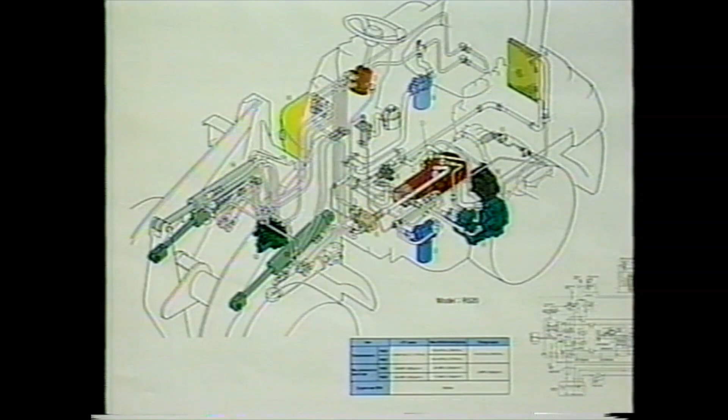The use of hydraulic systems has increased the productivity of all modern equipment. Hydraulic systems allow operators to control enormous amounts of mechanical energy and to perform large work tasks both quickly and economically. With proper maintenance, power equipment will provide many hours of service with little or no costly downtime.

When service is required, problems that occur are easily handled when the technician uses the right diagnostic methods and tools.

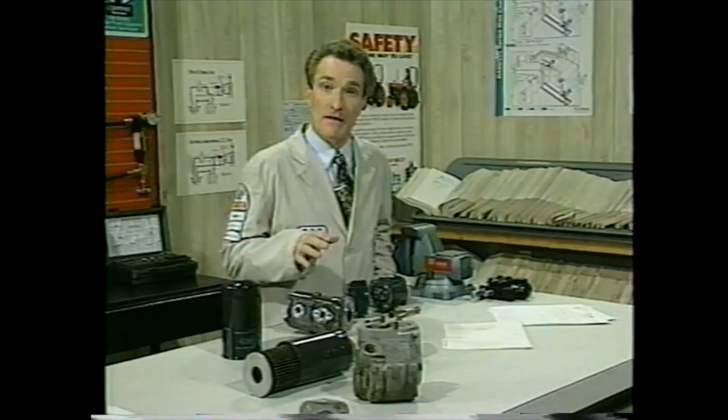Hydraulic systems provide a challenge to the professional technician. Modern hydraulic circuits incorporate logic to protect the operator and machine. When these systems need repair, proper diagnosis is the key to reducing downtime for equipment operators. Misdiagnosis is a major problem that causes significant financial loss and extra downtime each year.

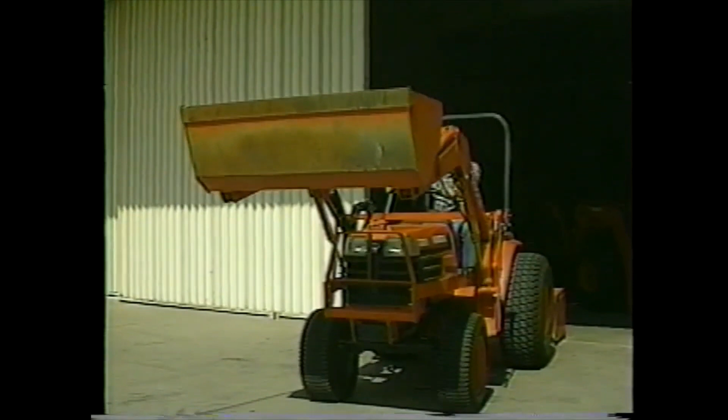In one warranty case, the technician's initial diagnosis on a loader with a slow cycle time was a bad pump. After he changed the pump, the machine's performance or cycle time improved only slightly. The technician then replaced the loader control valve, which fixed the problem. The total cost of the repair exceeded $800.

After testing the components and inspecting the service records, Kubota's warranty department found no problems with either the pump or control valve. The system cartridge relief valve was finally found to be faulty. With the proper test equipment and diagnostic techniques, the technician could have quickly discovered the problem and repaired it. The cost of this bill was excessive. It was unfair to the customer and the dealer, who had to absorb the difference in the warranty cost.

Our customers expect us to find the correct problems in the shortest possible time and at minimum cost. We owe our customers the best possible service.

The purpose of this program is to give you, the technician, an overview of the process of hydraulic system troubleshooting and repair. We'll demonstrate the most common types of problems encountered by Kubota technicians. The procedures demonstrated in this video will help you locate just about any hydraulic problem you may encounter.

After completing this program, you'll be better prepared to prevent a misdiagnosis. You'll also save your customer expensive downtime and your dealership time and money.

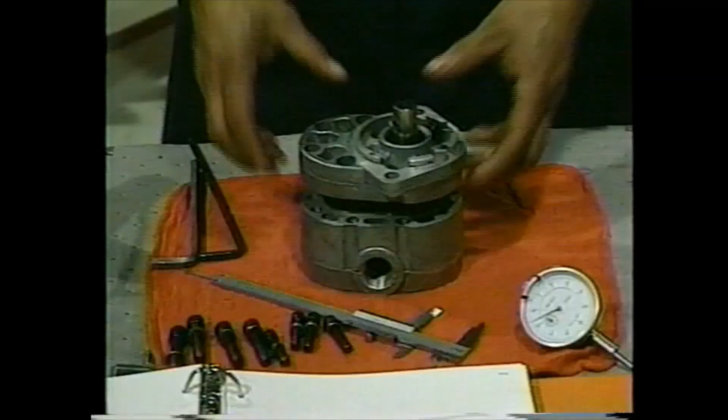Professional troubleshooters have a basic understanding of hydraulic components, a basic understanding of hydraulic systems, a full understanding of hydraulic symbols, a full understanding of hydraulic circuit diagrams, and a full understanding of hydraulic circuit testing and diagnostic tools.

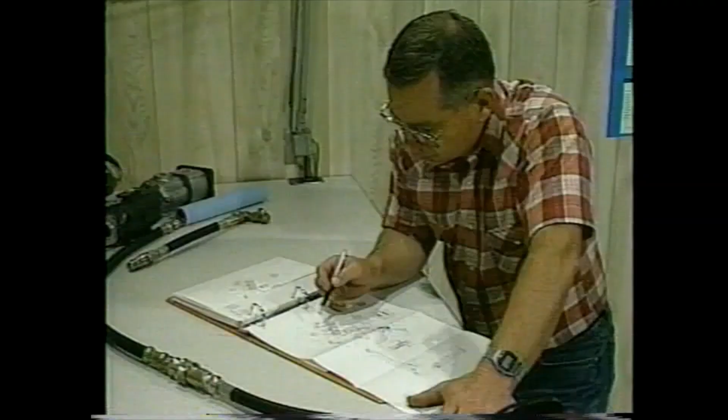Let's take a minute and review our systematic approach to troubleshooting. First, know the system and the components that make up that system. You should also know the path of flow or sequence of events. Study the technical manuals and schematic diagrams of the equipment you're going to evaluate. Never make assumptions or second-guess a system.

Second, talk to the operator and field technicians, when possible, to get first-hand information on the machine's history. Third, inspect the machine thoroughly for mechanical and safety problems. Don't forget to remove the keys and tag the steering wheel before starting your work. This is done to prevent someone from starting a machine while it's being worked on and is out of service.

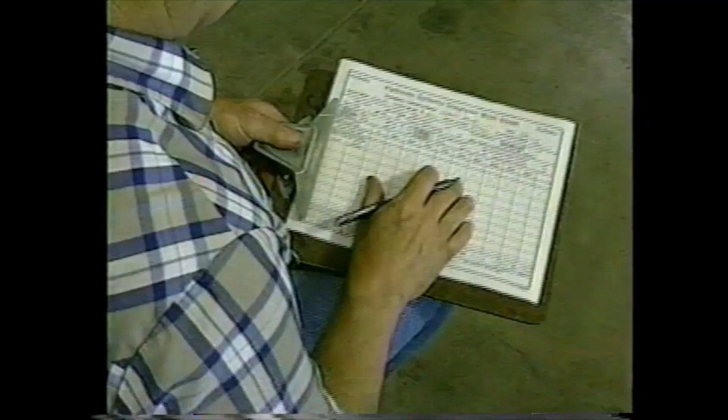Fourth, list possible causes for the problems found in the service manual's troubleshooting charts. Start with the quickest and most obvious things. Fifth, refer to the hydraulic system schematic. Pencil in pump flow and valve opening pressures for later reference.

Lastly, you should be very familiar with the test circuits in order to use the diagnostic tools properly. In this VIP service training program, we'll use information from 4 actual cases where technicians failed to follow the accepted standard practices, resulting in unnecessary service time and part replacement. These 4 case studies will provide you valuable experience to strengthen your skills in diagnosing hydraulic system problems.

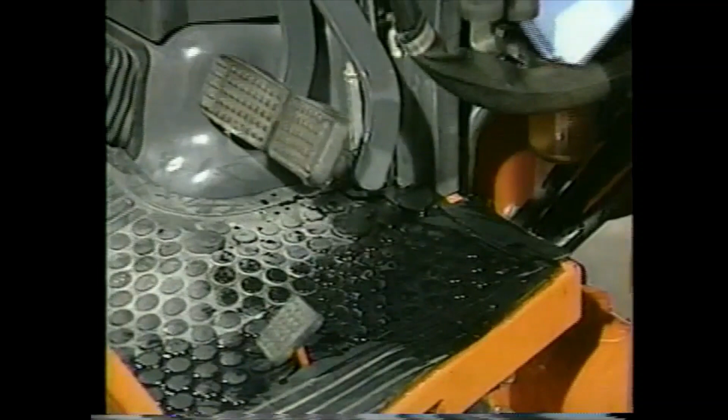But first, let's review a few safety points. Remove all hydraulic pressure by stroking the control valves. Use only the proper tools. Use a paper towel to find leaks, never your hands. Remember to remove the key and tag the steering wheel to prevent any injuries and damage to equipment.

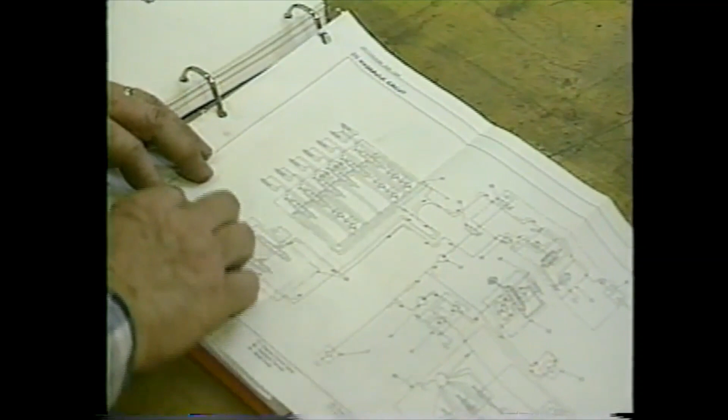Before a technician can make an accurate diagnosis of a hydraulic problem, he must be familiar with the particular system he'll be working on. Hydraulic schematics provide a graphical representation of all the components in the sequence in which they operate. Unfortunately, the technician didn't find the hydraulic schematic for this model loader, so he looked at one for a similar model.

Before you start to work on any hydraulic problem, review the manuals and reference materials so you understand that particular system. Studying ahead of time allows a technician to familiarize himself with the machine even before he sees it.

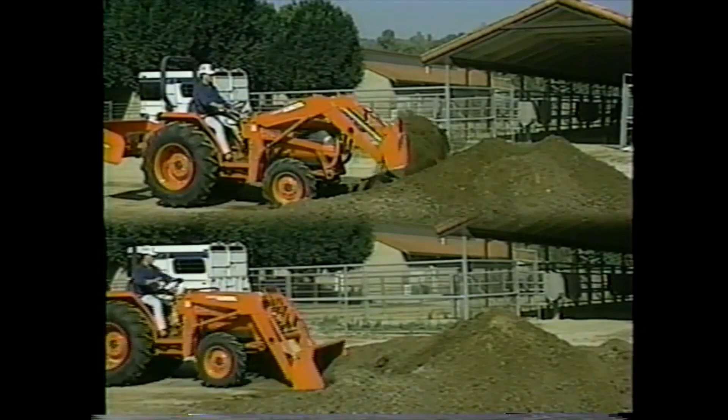In this case, the operator explained to the technician that the 3-point hitch, power steering, and loader functions were erratic at times, and loader operations had been getting slower over the last several weeks. He also told the technician he compared this tractor with others he operates.

The technician asked the operator when the problem first started. The operator pointed out that this was the second time it had happened. The first time, at 680 hours, the system gradually slowed down, then it seemed to correct itself. It also made an unusual noise somewhere around the engine compartment, but the noise went away.

The technician asked to see the maintenance records, then checked the number of hours on the tractor, about 930 hours. The operator said he knew he was a little overdue for maintenance, but he'd been working 12 hours a day for the last 4 months.

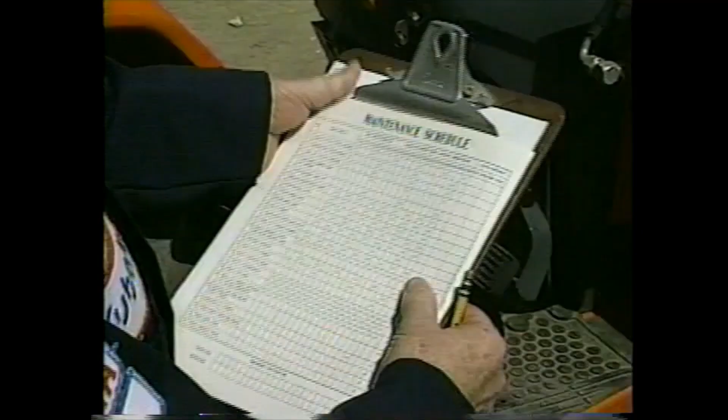The records also indicated that the hydraulic oil filter was changed at 65 hours, and the next 4 filter changes were skipped until a week ago when all the oils and filters were changed.

The technician operated the loader and evaluated its cycle time. He had no trouble establishing the machine's slow cycle time by comparing it to a second tractor in the yard. The technician decided to do a full pump test at the shop to verify the pump's flow rate.

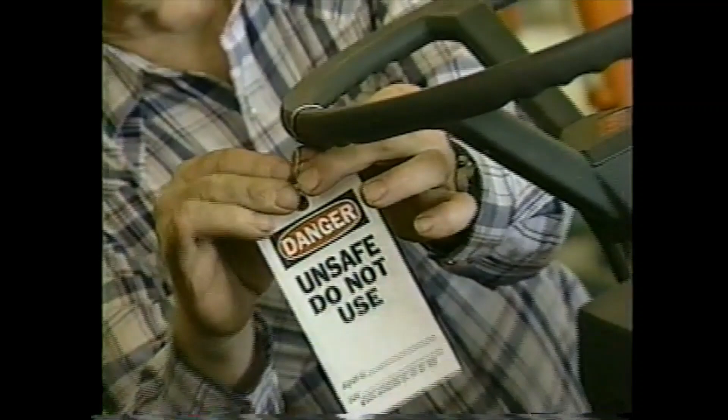Before working on the tractor loader, he tagged the steering wheel and removed the key.

To accurately diagnose the pump, you must isolate it from the hydraulic system, so no other component can cause the pump to look defective. This is called a direct pump test.

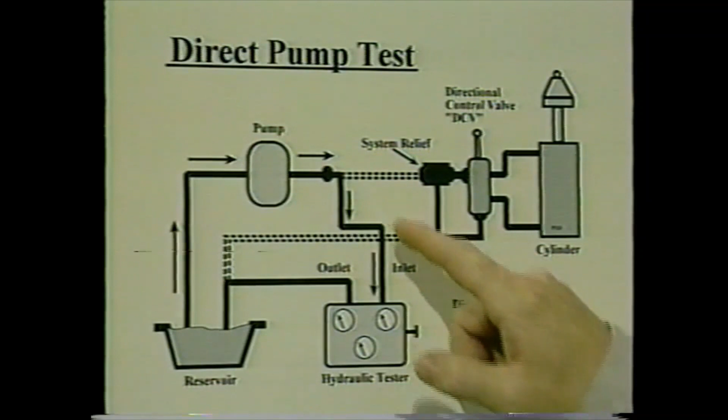The rest of the system can't work properly if the pump is not generating its rated gallons per minute at its rated pressure. From our direct pump test diagram, we can see that you must first disconnect the pump's high pressure outlet pipe and connect the hydraulic system analyzer.

Special adapters are available from OTC to accomplish this procedure. The analyzer measures the hydraulic oil temperature, the pump's flow in gallons per minute, and the pressure developed from restricting the oil flow through the analyzer using the flow control valve.

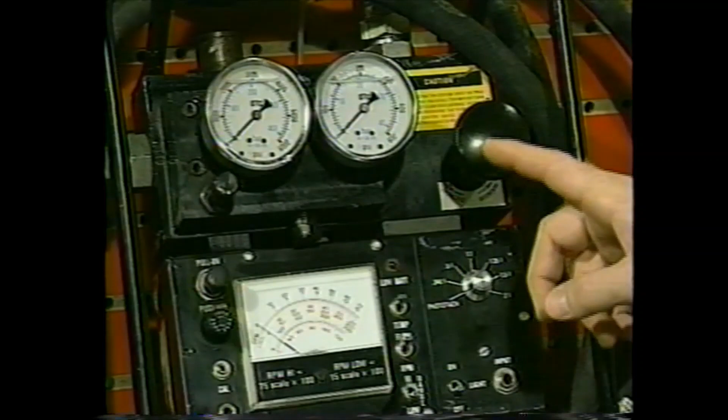Hydraulic couplers are frequently damaged during service. To prevent damaging any couplers, always use the 2-wrench method to loosen and tighten hydraulic hoses and fittings. For more information on the 2-wrench method, see the reference manual.

Now, let's get back to our case study. After the pump outlet fitting and tubing were removed, the technician selected the correct pump adapter from the kit.

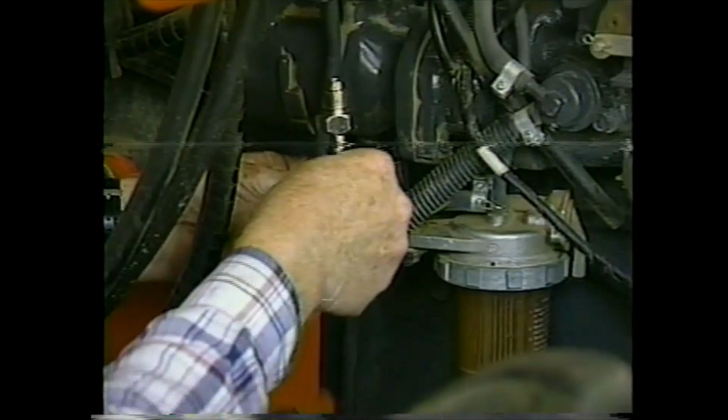He installed the adapter, then connected it to the analyzer with a high-pressure hose.

He placed the oil return hose from the analyzer into the transmission oil fill port and wired it into position. In this case, as with many tractors, the transmission doubles as the reservoir for the hydraulic oil.

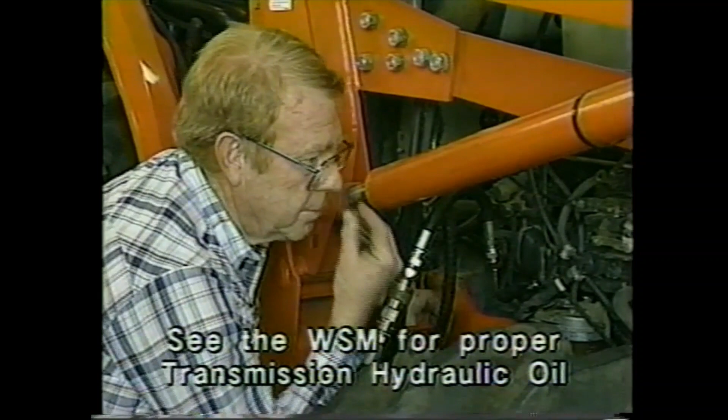The technician first checked the transmission fluid to be sure no one had accidentally filled the transmission with gear oil instead of hydraulic oil. Next, he opened the flow control valve on the analyzer.

If the engine is started before the flow control valve is opened, the hydraulic pump could break from excessive back pressure or cause damage to the analyzer.

The technician started the tractor and checked the oil temperature. It was a little cool, so he applied a load to the pump to heat the oil.

He brought the engine up to about 3/4 throttle and the hydraulic oil pressure up to 1500 psi by very slowly closing the pressure control valve on the analyzer.

The technician knew there was no safety valve in the system, so if he closed the pressure control valve on the analyzer too quickly, the pressure would rise too fast and damage the pump.

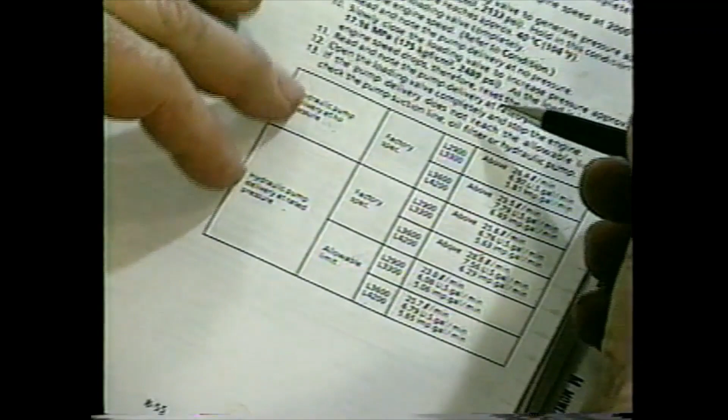While the technician was waiting for the oil to heat up, he looked at the specifications for the hydraulic pump. He found it to be 7.79 gallons per minute at 0 psi and 7.56 gallons per minute at 2500 psi.

After the hydraulic oil reached 120 degrees, the technician increased the engine speed to full throttle, 2700 RPM.

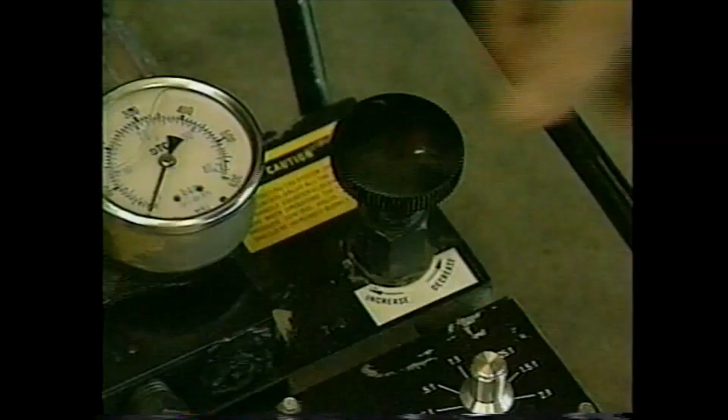He removed the pressure by fully opening the flow control valve on the analyzer and read the flow meter. The technician knew to keep a record of all tests for future analysis. He wrote down 7.6 gallons per minute next to 0 psi.

The technician began closing the flow control valve until the pressure reached 1000 psi. He recorded the gallons per minute, or GPM. As he increased the pressure at 250 psi intervals, he wrote down the corresponding GPM until he reached the maximum factory pressure rating of 2500 psi. At this pressure, the flow was 5.7 GPM.

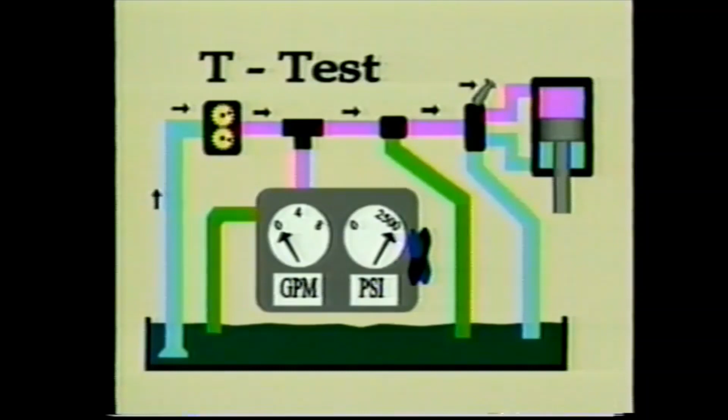That concludes the direct pump test. By isolating the pump from the rest of the hydraulic system, we can be certain we're accurately testing the pump. To accurately diagnose the entire hydraulic system, a T connection must be made on the pressure side of the pump. Tapping in at this point allows you to control the flow and pressure during the remaining tests.

Kubota has provided a test port in the hydraulic block for this purpose. To set up the T-test, he installed the analyzer input hose T-fitting at the right-hand port on the adapter block. Then he removed the loader pressure hose. This isolated the main relief valve from the rest of the system.

The technician then proceeded to analyze the system's working pressure and relief valve operation. He opened the analyzer control valve, started the engine, and brought it up to 2700 RPM. Then he compared the pump's free flow with no restriction to the pump's full flow rate at the system's maximum operating pressure.

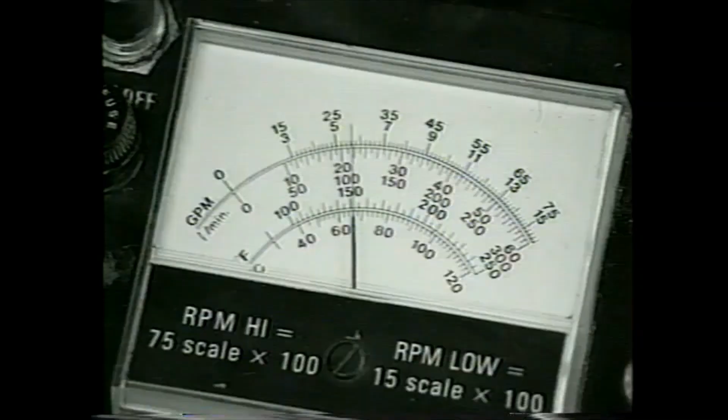He slowly closed the analyzer flow control valve. Starting at 1000 psi, he read and recorded the flow at 250 psi intervals. When the system reached the pilot relief valve pressure, he heard a high-pitched squeal as the relief valve opened. He recorded a flow rate of 5.7 GPM at 2,250 psi.

As he closed the flow control valve further, system pressure continued to increase until the relief valve was fully opened. At that point, the flow rate of the analyzer dropped to near zero. The reason for that is, when the relief valve is fully opened, the path of least resistance is through the relief valve, not through the analyzer.

The technician opened the analyzer load valve, reconnected the loader circuit, and started the engine. After increasing the engine RPM to its maximum, the technician pulled back on the bucket directional control valve to pressurize the system.

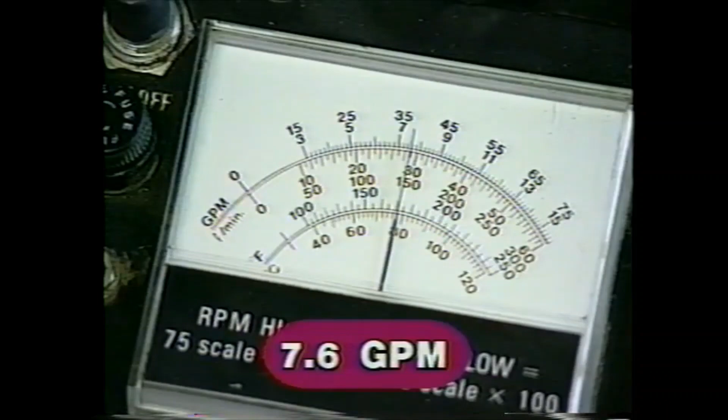He read the pump's free flow through the analyzer at 2,700 RPM and released the cylinder spool valve. He compared this T-test pump reading to the direct pump test reading he took earlier. Both measurements at 0 psi were 7.6 GPM. After recording his data, the technician shut down the engine. He was finished with his testing and was ready to study the measurements.

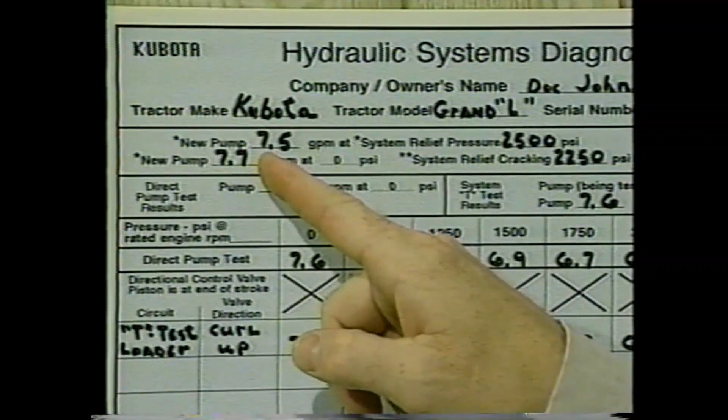From the technician's notes, we see the pump is designed to flow at 7.7 GPM with no restrictions. It tested at 7.6 GPM. We also know that a new pump is designed to flow at 7.5 GPM at 2,500 psi. The tractor pump measured 5.7 GPM at 2,500 psi. The data recorded by the technician shows a progressive drop in GPM as the psi is increased. Notice that at 2,500 psi, pump flow stopped when the system relief valve fully opened.

Try your skills at solving this problem. Turn to the What's Your Diagnosis sheet in the reference manual and write your diagnosis under Case Study Number 1. Put your VCR on pause while you attempt to solve this problem. When you think you have an answer, push play and see what the technician found.

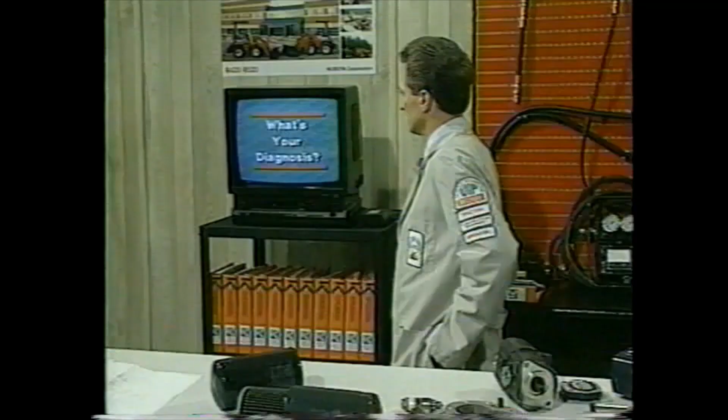If your diagnosis led you to the pump, you are partly correct. The pump test data showed that it was operating at 76%, which is less than the minimum acceptable flow at full pressure. As the gallons per minute fell off from 7.6 to 5.7, the entire system response slowed down. This resulted in a slow cycle time.

The real problem didn't lie with the pump. It was caused by a lack of maintenance. Too often, maintenance takes a back seat to production. Remember, in the case of this machine, it was serviced after 1 week's break-in, then left unserviced because the fluid appeared okay. This machine missed 4 filter changes.

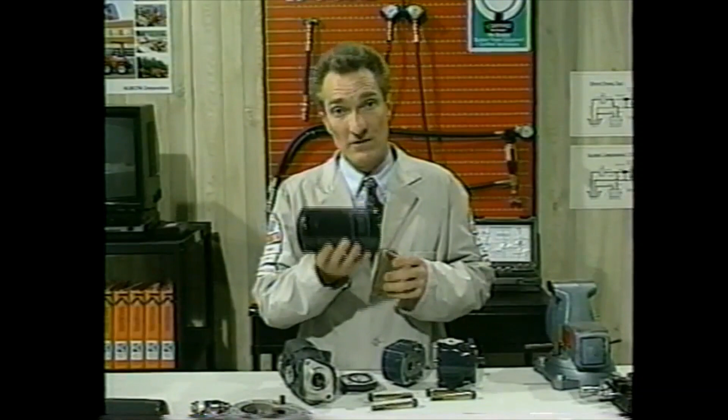The oil appeared clean because as the filter becomes clogged, it cleans more efficiently. The operator stated the problem occurred once, then corrected itself. As the filter clogged, the pump efficiency decreased and eventually the pump cavitated. That's the noise the operator heard. The cavitation action ate away tiny particles on the pump.

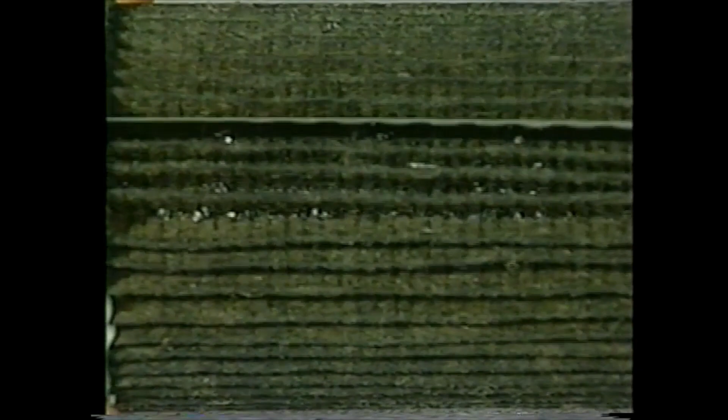These particles then circulated through the hydraulic system, causing erratic operation of the power steering, loader, and 3-point hitch, and helped to further plug the filter. Eventually, the hydraulic filter safety valve opened, bypassing oil and contamination from the dirty side of the filter to the clean side without any filtration. Metal and other particles that collected on the filter surface washed through the filter safety valve into the system, eroding the pump even further. The difference between full pump flow and stalled system flow indicated spool valve leakage. To further test a valve body for leakage, remove the pressure and return hoses.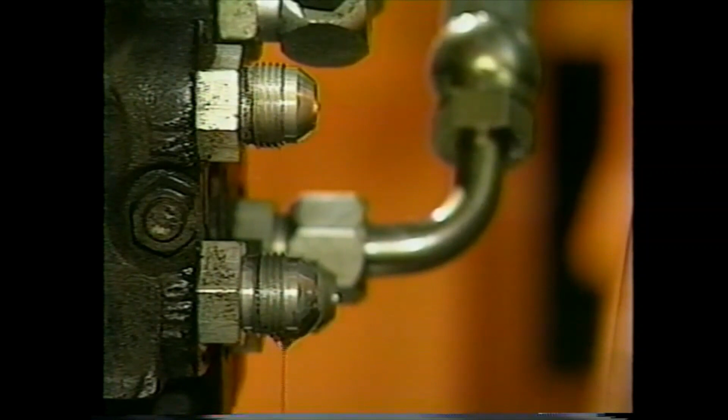Remove and label all the cylinder hoses. Slowly apply system pressure to the suspect cylinder hose port with the hand pump. Valve leakage can be observed if oil weeps or runs out of either the pressure inlet port or the return to reservoir port.

Pressure should hold at 90% system pressure with little pumping if the spool does not leak. Spools under pressure can leak either to the open center port or to the return to reservoir port. If the hose port does not hold pressure, it may have a leaky spool or a defective circuit relief valve

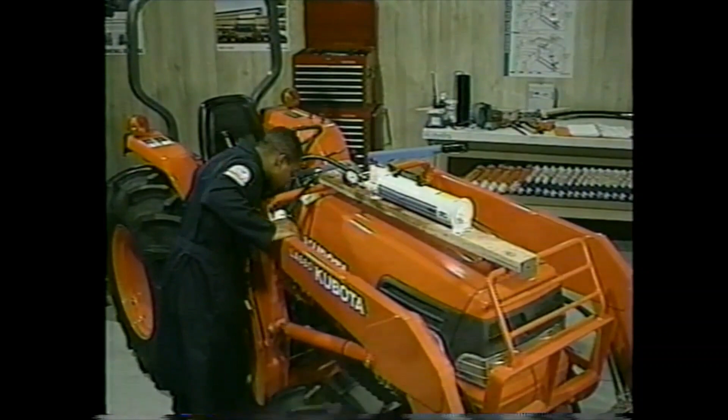that either needs replacing, cleaning, or adjusting. Some relief valves can be easily adjusted by rapidly stroking the hand pump while turning the adjustment screw. The valve is properly set when the needle on the gauge does not rise above the valve's specified setting when the pump is rapidly stroked.

Pressure leak down indicates either a leaky circuit relief, a leaky circuit spool, or both. Replacement of the circuit relief is necessary at this point to establish which component is defective.

When the tech first realized the pump was only operating at 76%, he should have replaced it and direct tested the new pump before continuing. When you don't have an exchange pump, continue testing using the old pump data as a substitute reference. That way, you can find out if there are any other failed parts. This will minimize downtime, as all parts can be ordered at one time.

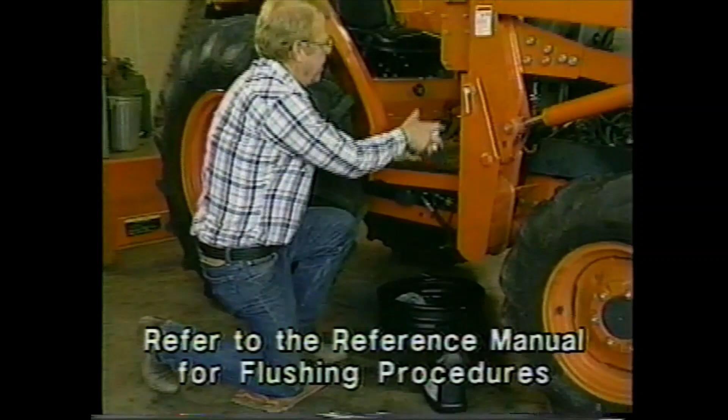After replacing the pump, flushing the system, and changing the filters, he repeated the tests and the system checked out okay. He then put the tractor loader through the loading cycle and found it to be satisfactory.

Modern machinery operates quickly, efficiently, and inexpensively when maintenance is performed at the prescribed intervals. Hydraulic systems are faithful servants when supplied with an adequate amount of clean, cool oil.

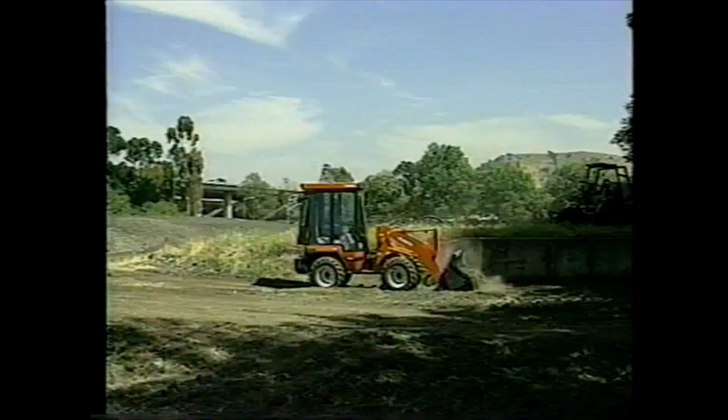The job had taken much longer than expected, causing them to operate the unit 200 hours past its scheduled maintenance interval.

The operator explained that he noticed a burned oil smell when he checked oil levels. A little later, the cycle time of the loader slowed considerably.

The operator also remembered that he'd accidentally bumped into a loading dock with the bucket partially curled up just before the problem started. He got off the loader and looked it over, but didn't see any damage.

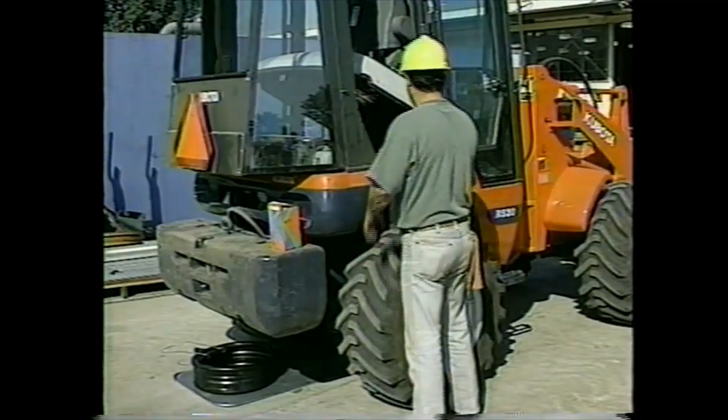When the job was finished and the loader returned home, they performed all the overdue maintenance.

After servicing, the loader still had a slow cycle time. Additionally, it seemed to lose some of its lift capacity. He then took it into the shop for a closer look.

The technician pulled out the shop manual and opened it to the hydraulic schematic diagram. He knew that with all the hydraulics on this R520 loader, there were plenty of opportunities to make diagnostic mistakes.

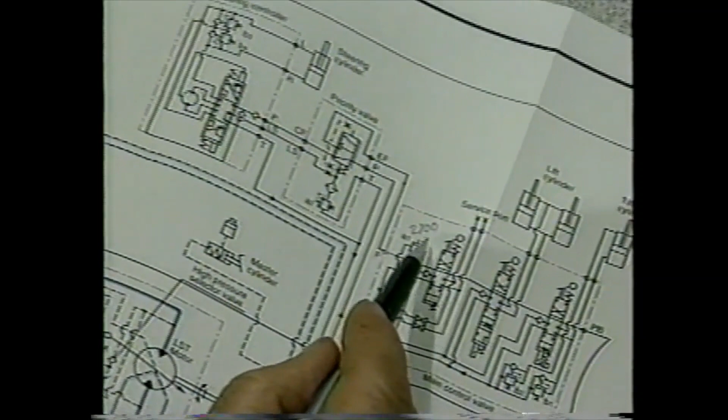The technician saw there were 3 hydraulic pumps: a large pump for the load sensing transmission, a small pump to charge the large pump, and the main pump in the center for power steering and loader operations. He saw that the discharge of the pump went to the priority valve that gives power steering priority over cylinder functions, and that the main system pressure relief valve was set for 2700 psi.

Knowing the filter had just been changed, the technician decided it would be best to start the pump to verify both the pump flow and pressure produced. He knew the pump flow determines the speed of the cylinder, and the pressure determines the lifting capacity of the cylinder. The technician then looked up the pump flow specifications. So he wouldn't forget them, he wrote them down.

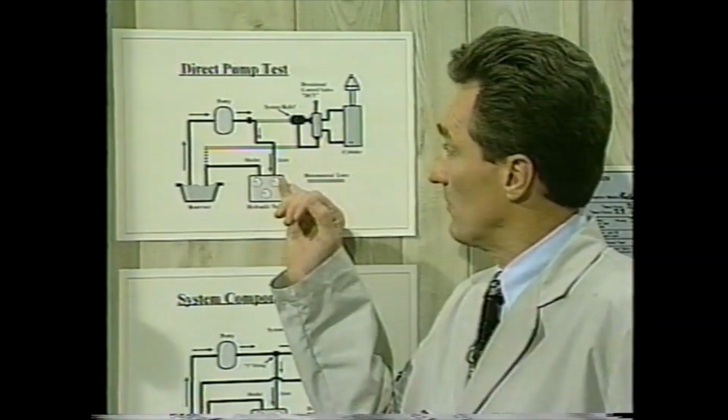Before getting started, the technician removed the key and tagged the steering wheel, as in case study number 1. He then installed the analyzer inlet hose to the pump fitting to test the pump flow and pressure, just as he had in the first case study. He attached the return hose to the reservoir and wired it into place.

While the engine was idling, the technician examined the oil returning to the reservoir for moisture, air bubbles, or signs of burned or dirty fluid.

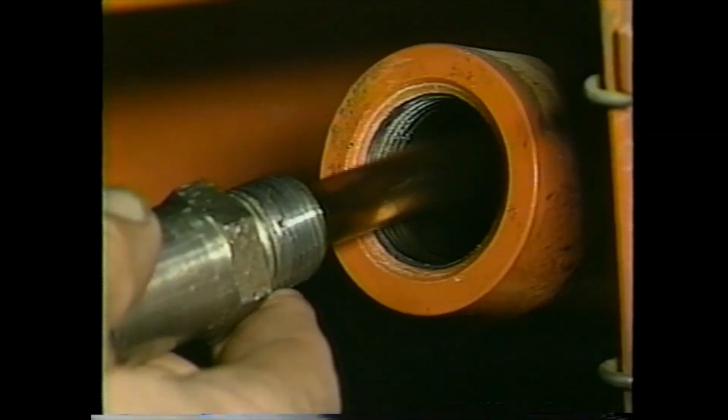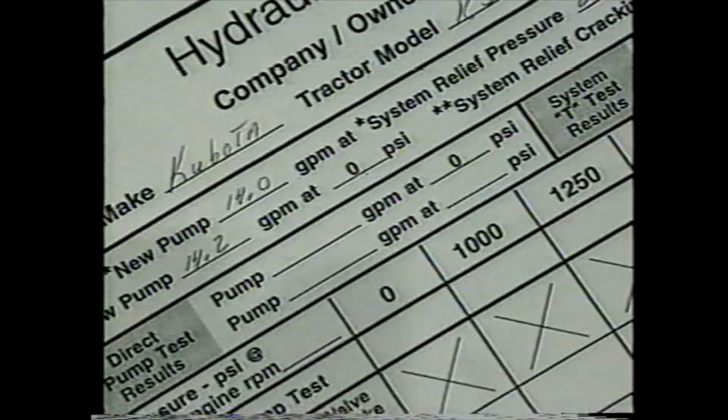Next, he checked the pump flow. With the pump isolated, the technician measured 14.0 GPM at near 0 psi and 9.1 GPM at 2700 psi, and he recorded those readings.

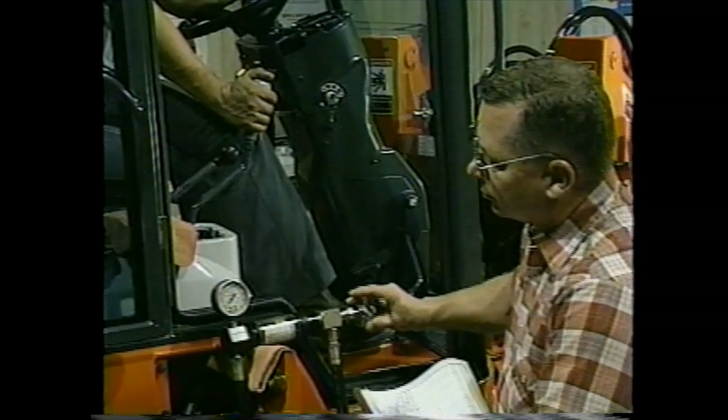Next, he installed a T-fitting downline from the P port of the priority valve to test system flow and pressure. A second technician stroked the lift cylinder control valve downward to place the weight of the loader on the lift cylinder to develop maximum system pressure. He slowly closed the analyzer control valve to bring the pressure up to 1000 psi.

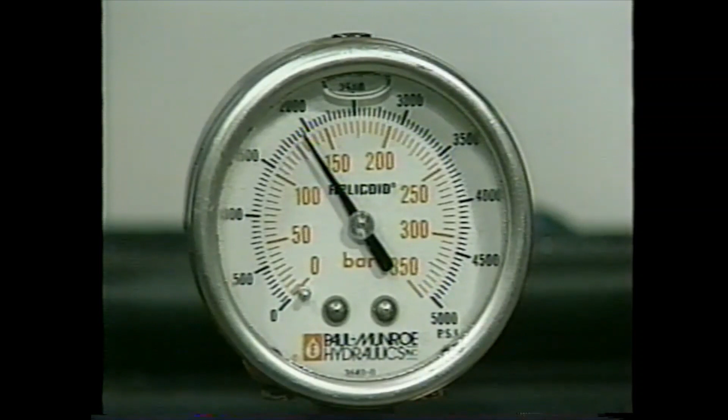The technician then took pressure readings at 250 psi intervals and recorded his data. When the pressure reached 1950 psi, the analyzer valve was fully closed. He read 10.0 GPM on the flow meter.

As he opened the flow meter and shut down the system, he mentally compared the operating pressure and flow rate to the specifications in the service manual. The technician saw the pump flow at 2700 psi was 65% of normal, and the system pressure had dropped to 72% of spec. He decided to change the pump.

After replacing the pump, the technician took time to diagnose the failed pump. He examined the parts and noticed scuffing on the wear plates and a dark lacquer coating on all the metal surfaces. The technician knew that very minor scuffing on the low pressure side of the pump is normal, and was satisfied that what he saw was excessive wear.

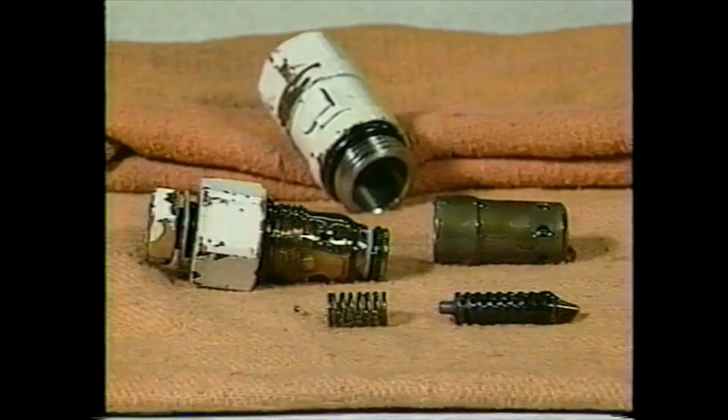After seeing the inside of the pump, he decided to remove and examine the system relief valve. He found lots of brown, sticky lacquer. He knew that these deposits alter the performance of a relief valve, so he decided to replace it.

The technician then retested the system. He was sure he'd solved the problem until he noticed that the system pressure was only up to 2400 psi, about 300 psi lower than he'd expected.

The technician saw from the schematic that the steering and priority valve circuits could affect the system pressure if there was an additional malfunction in that area. To make sure, he isolated the loader valve circuit by plugging the hoses going to the valves.

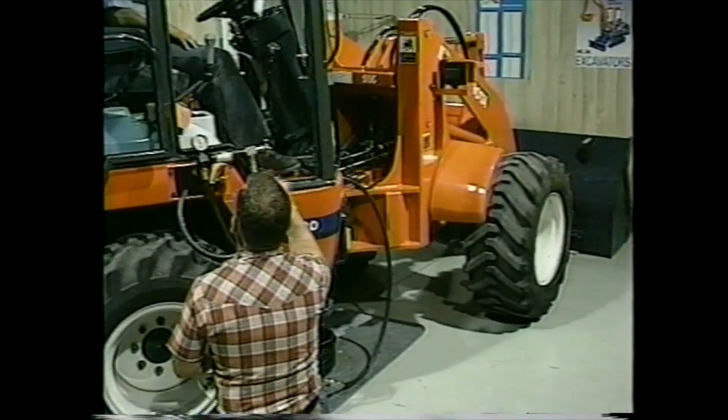The technician knew there was no system relief, so he slowly increased the pressure on the system by restricting the bypass oil until the pressure reached 2700 psi. Observing the pump flow didn't decrease, the technician knew there was no leakage in the steering and priority valve circuits.

So he removed the plug and reinstalled the T-fitting.

To verify the problem had been solved after establishing the priority and steering valve were good, and there was a new pump and system relief, the technician stroked the lift valve and was satisfied it was fixed when he read full pump flow and system pressure at 2700 psi.

Place your VCR on pause while you attempt to determine the technician's oversight. Try your skills at solving this problem. Turn to the What's Your Diagnosis sheet in the reference manual. Write your diagnosis under case study number 2. When you think you have an answer, push play and see what the technician found.

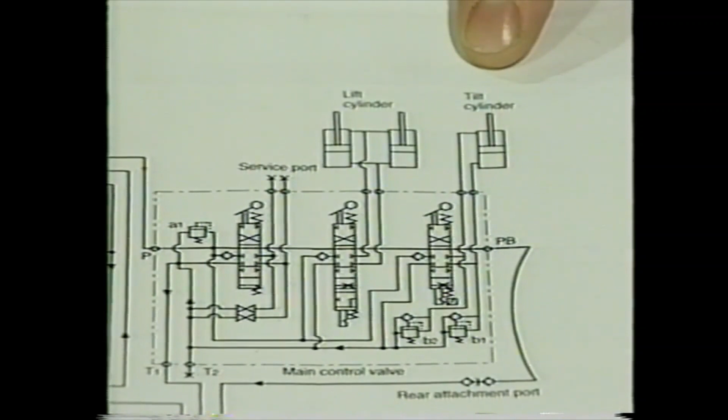If your diagnosis led you to believe the circuit relief valve for the tilt cylinder was faulty, you were correct. The technician did not consider the fact that the system dropped in pressure only when he stroked the tilt cylinder. The technician should have seen that the tilt cylinder has circuit safety reliefs, but the lift cylinder has no safety relief for overload protection.

If he had stroked the tilt cylinder, he would not have read the specified system pressure on the gauge. Stroking each of the cylinders separately would have told him the tilt cylinder was at fault.

After getting advice from his shop supervisor, the technician looked up the loader relief valve setting and found it to be 3,484 psi. When he tested the loader circuit safety relief, he found it cracked open at 2,100 psi and was fully opened at 2,500 psi.

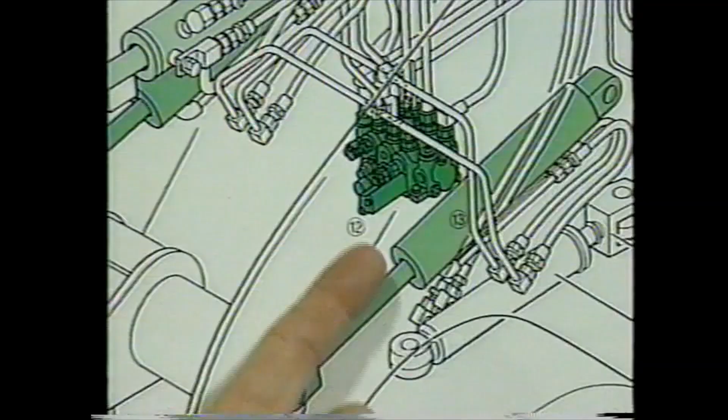The pressure of the relief valve was too low. Pilot operated relief valves are designed to have a cracking pressure at 90% of their operating pressure. This circuit safety relief valve opened at 60%, so there was no choice other than to replace it.

Cracking pressure is easy to test. Slowly raise the pressure on the hand pump until the oil starts flushing through the relief valve. This occurs around 90% of the relief setting.

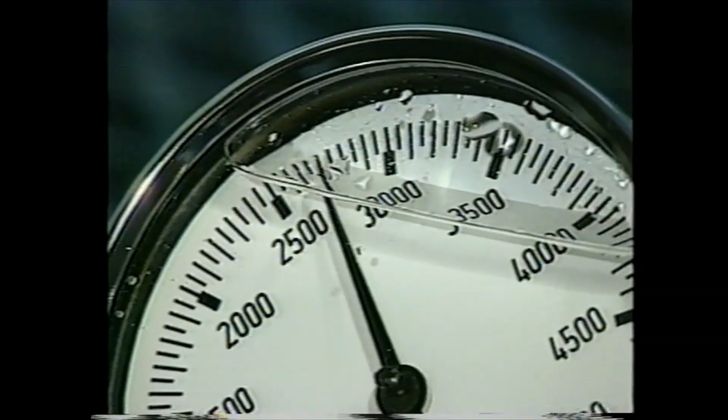Remember, if the cracking pressure increases beyond 10% of the system relief pressure, the system's response will slow down.

Also, remember how the loader operated in the hot desert for an overextended service period? Dust had accumulated around the radiator and further compounded the desert high temperatures. The hotter an oil gets, the faster it oxidizes, reducing the oil's service life. As the summer progressed, so did the oxidation of the oil. As the oil oxidized, varnish and gum formed on all the hydraulic components in the system.

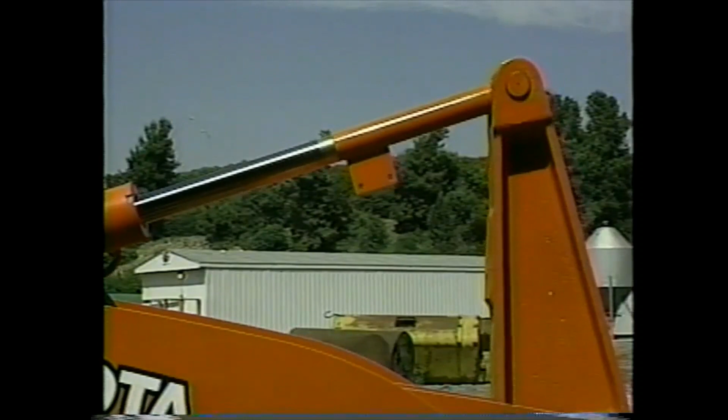Remember when the operator hit the loading dock? The power of the loader pushing against the loader bucket pressed down on the piston in the cylinder and caused a spike in pressure to open the circuit relief valve. Because of the lacquer buildup, the valve did not close and seal properly, resulting in a much lower opening pressure.

Remember, the system's maximum operating pressure is determined by the relief valve, which opens at the lowest pressure. This could be either a circuit relief valve designed to be set below system pressure, or a defective circuit relief valve opening at too low a pressure.

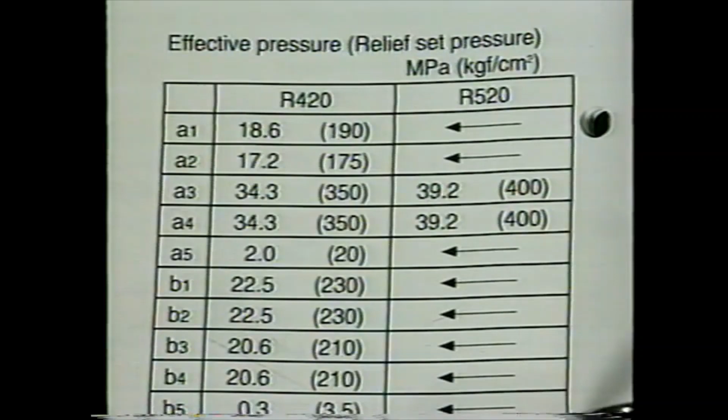Look closely at the schematic again. Some circuit reliefs are set higher than the system relief. This is done to prevent external forces from damaging components due to shock pressure caused by equipment bouncing when traveling, or compression shocks, such as hitting a stationary object with the valve in neutral.

The maintenance schedules suggested by Kubota are for normal operations. In operating conditions such as we saw in this case study, maintenance intervals should be shortened to maximize the service life of the unit. Kubota, like any other company, depends on professional technicians like yourself to keep equipment running at its peak performance levels to keep customers happy.

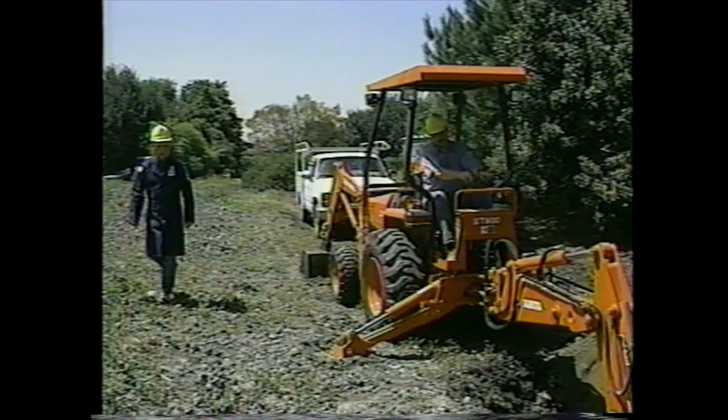As the technician works his way through the diagnosis and repairs, keep in mind the circuits that you just studied. The operator in this case study complained that all hydraulic functions seemed slow and low on power. He had purchased the L35 at an estate sale and didn't have any maintenance records.

Keep close track of what the technician does. Read the gauges and the test meters, write down the information, and look for clues.

The technician started by studying the hydraulic circuit. Not having any service records or operation history from which to gather clues, he thought he should begin with the pump. He saw there were two pumps. The first pump was for the hydraulic power steering. The second pump appeared to feed the backhoe and loader.

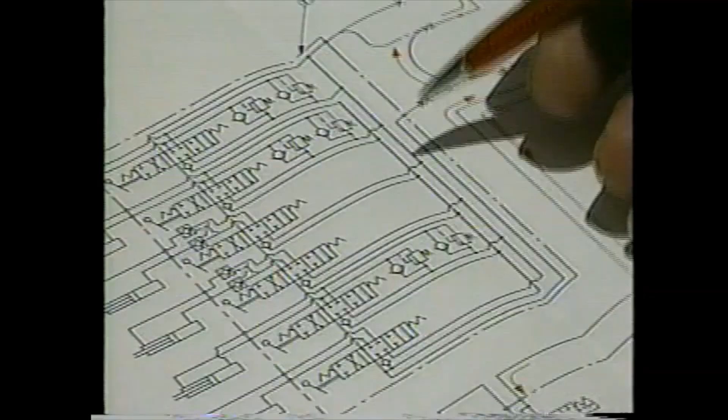The technician traced this pump's output and located the system relief valve. He noted that this is the pressure control point for the three-point hitch, loader, and the backhoe. He also noticed that three of the backhoe spool valves have pairs of check and pilot reliefs and anti-void valves.

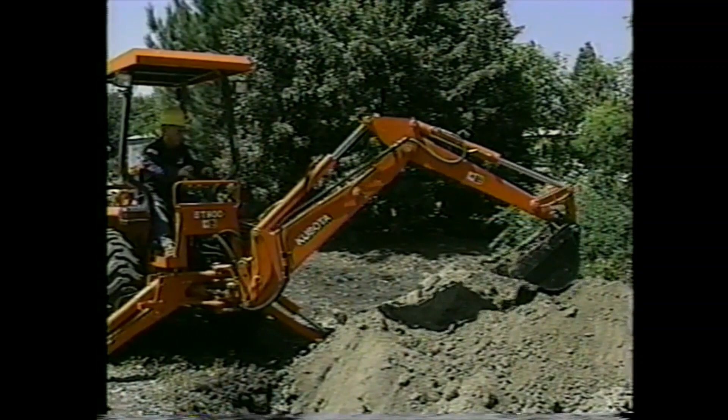Thinking he understood the system, the technician decided to test the backhoe. Seeing the system was already warmed up, he proceeded with his testing. With the engine running at full throttle, the technician pulled back on the boom lever to lift the boom as fast as possible. He was looking for two things: how fast it lifted, and if the engine labored from a lack of power. He didn't notice much change in engine RPM, but he definitely saw that the boom came up too slowly.

The technician felt the low power was not the engine's fault, so he decided to do a direct pump test. After completing his tests, he found the pump was only delivering 7.0 GPM instead of the 10.8 GPM spec. That's 65% of the rated flow. He thought the low flow rate certainly indicated a bad pump. So he replaced it.

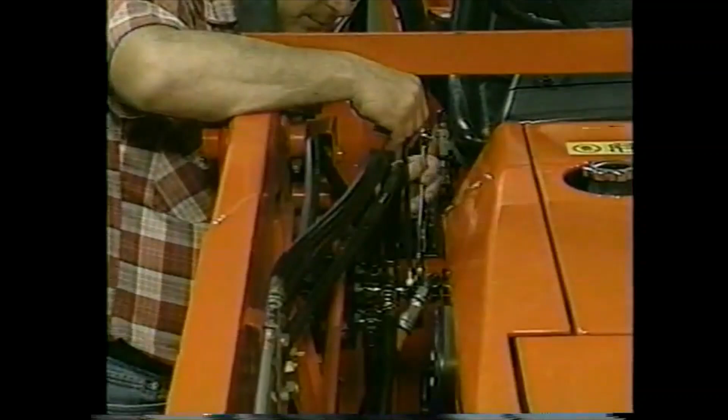Next, he decided to measure the system pressure by making a T connection at the loader valve inlet pressure port. Because of the technician's experience, he knew he must use a circuit which didn't have a circuit relief to perform the T test. So he used the bucket circuit. He stroked the bucket lever and then slowly brought up the pressure. He read 1800 psi. Knowing the system pressure should be 2500 psi, he was sure the system relief valve was bad. So he decided to change it.

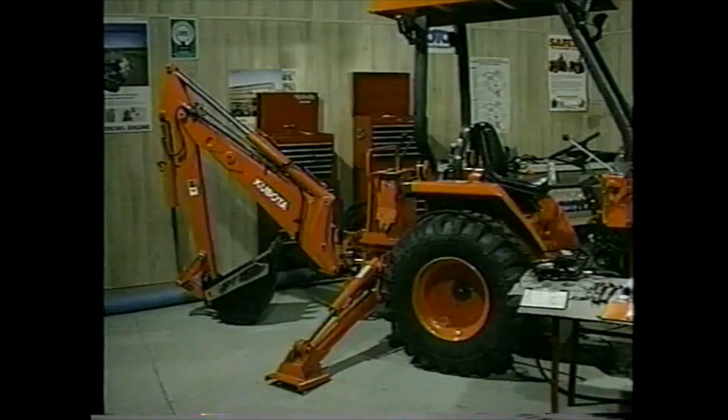Just to make sure he'd fixed the problem, the technician tested the system pressure once more. He measured 2500 psi, right where it was supposed to be. Feeling good about his ability to correct the problem, he decided to fold up the backhoe and put the tractor away. The technician looked surprised when the boom was still operating too slowly. He looked down at the pressure gauge on the analyzer and, to his surprise, saw it was at 1950 psi.

Now he was really confused, so he tried something else. He put in the boom lock on the backhoe. Then he pushed the boom lever back to check the second relief valve, and sure enough, it read 2500 psi.

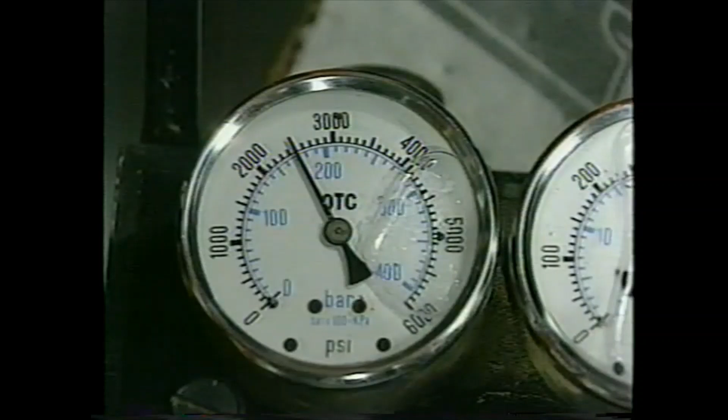The technician knew the answer would be found on the circuit diagram. He saw the boom and dipper stick control valves had their own relief valves, then noticed the loader bucket spool valve did not. Looking up the opening pressures of the boom and dipper stick relief valves, he saw they were both higher than system pressure, about 3400 psi. That's it, he thought. The boom relief valve on the extend cycle was good, and the relief valve on the retract cycle was bad. He decided to replace the one boom circuit relief valve.

Performing one last test to assure himself that he'd found the problem, the technician pulled back on the boom cylinder lever. The boom still came up too slowly, but when the piston bottomed out, the gauge read 2500 psi. The technician was now totally confused. He asked himself, if the pressure is okay and I just put on a new pump, why is the boom so slow? The technician had carefully analyzed the system and found several failures, yet the problem still existed.

Try your skills at solving this operational problem. Turn to the What's Your Diagnosis sheet in the reference manual and write your diagnosis under Case Study number 3. Put your VCR on pause while you attempt to solve this low-power problem. When you think you have an answer, push play and see what the technician found.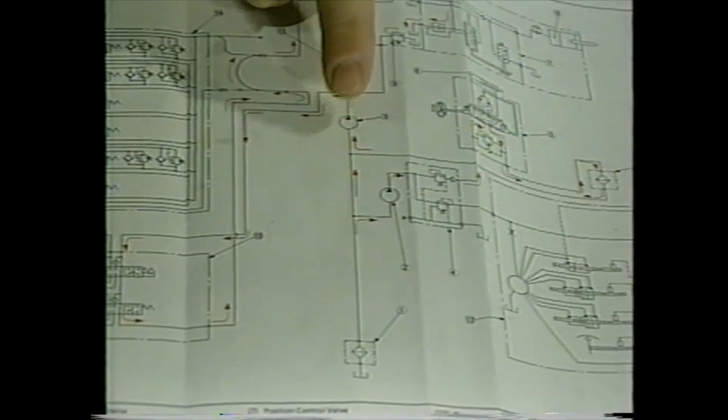If your diagnosis was that the problem involved the hydraulic oil suction filter located under the operator's foot platform, you are correct. All oil entering the system must first pass through the suction filter before entering either of the hydraulic pumps. Quite often, the hydraulic filter is overlooked by both maintenance and repair technicians. Unless an adequate flow of oil can pass through the pump's suction filter, sufficient flow cannot be developed by the pump, and everything downline from the pump will show a slow or weak response.

The technician made 3 unwarranted assumptions. First, he assumed the filter was good, even though there were no maintenance records. Second, he assumed from his flow test analysis that the low pump flow was the fault of the pump. And third, he didn't flow test the new pump. If he had, he would have discovered that it performed no better than the original pump. Granted, the relief valves did need replacing, but that would have been much easier to spot if the system's pump flow had been normal.

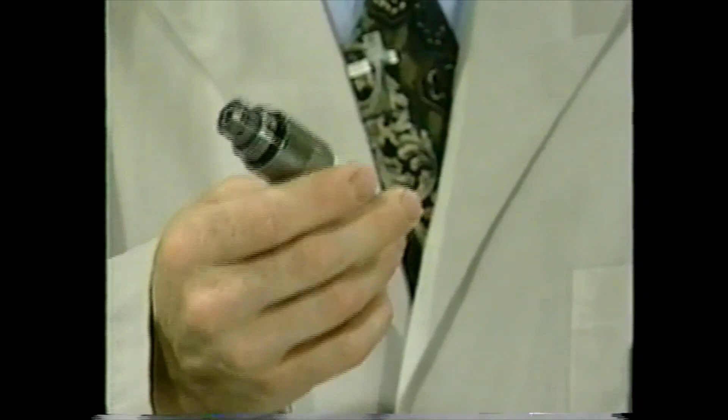System relief valves can be adjusted if improperly set at the factory. In this case, it was off by over 500 psi. If a relief valve is incorrectly set at the factory, Kubota recommends replacing or adjusting it. This procedure will prevent follow-up service calls.

Oh, one last thing. Why didn't the technician hear any cavitation noises? Because the backhoe was warm from use before the technician started working on it. Any cavitation noises from cold oil had disappeared as the hydraulic system warmed up prior to his tests.

The technician had his hands full with this tractor. When he found there were no maintenance records and all hydraulic functions were slow, this should have been a clue. He would have been wise to perform all maintenance operations before he ever started testing. If he had done this, he wouldn't have replaced a pump that was still good.

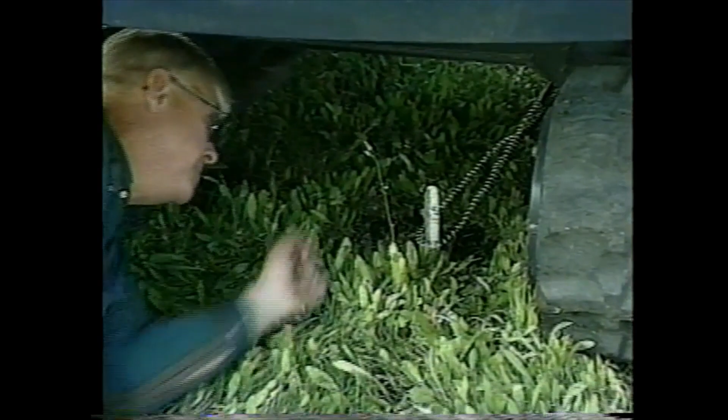The technician first inspected the maintenance and repair records. He asked the operator why the hose in the dozer blade had been replaced at 150 hours. The operator explained that the dozer hydraulic hose got caught on an old steel fence post that was barely sticking out of the ground and ripped it off.

The technician checked the workshop manual and studied the hydraulic schematic. He filled in his pump and system specs on his worksheet. He removed the key from the tractor and tagged the controls.

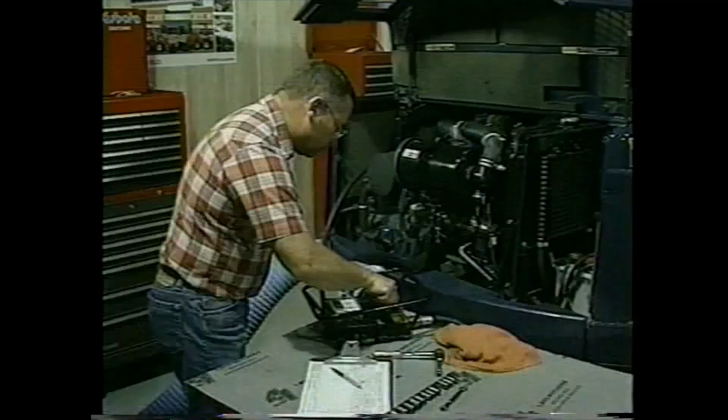After establishing that the suction filter had recently been serviced, the technician did a direct pump test and recorded 5.2 GPM. The test results showed no problem with the pump or suction filter.

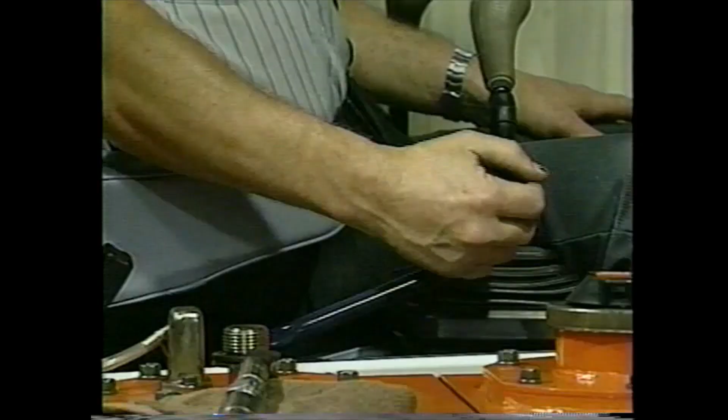Next, he installed the T-connection hose into pump number 3 to analyze the dozer system. He measured both system pressure and pump flow with both the swing cylinder and the dozer cylinder fully stroked. He compared the flow measurements at system pressure and found less flow in the dozer cylinder circuit, indicating internal leakage in the dozer circuit.

The technician knew there were only 2 components to the dozer lift circuit that could be at fault: the spool valve or the cylinder piston seal. The schematic told him there was no relief valve in the dozer circuit.

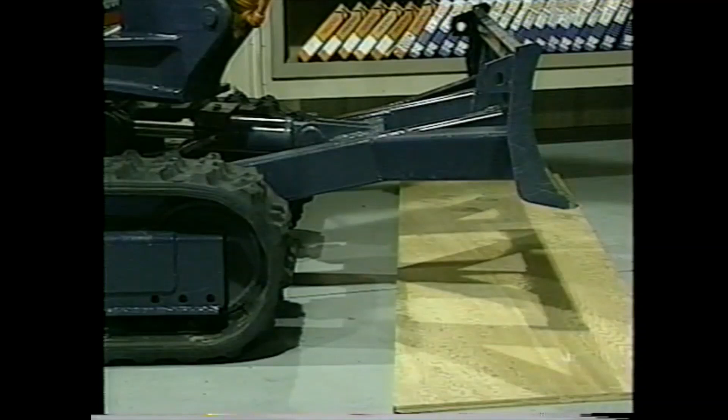The technician lifted the blade to see how fast it would creep down when the engine was shut off. Sure enough, it did settle rather quickly. After a few minutes, the technician thought, if the blade crept down, the piston seals were leaking. The technician decided to ask the shop supervisor before proceeding.

Did the technician make any assumption that wasn't true? What advice do you think the shop supervisor gave the technician?

Try your skills at solving this diagnostic problem. Turn to the What's Your Diagnosis sheet in the reference manual and write your diagnosis under case study number 4. Put your VCR on pause while you attempt to solve this operational problem. When you think you have an answer, push play and see what the technician found.

If your diagnosis was leaking piston seals, you are not correct. When the operator changed the damaged hoses, he failed to thoroughly inspect the new parts before installing them. His carelessness introduced dirt into the system and caused the dozer valve to be damaged and to start leaking.

The correct diagnosis to this case study was that dirt got into the anti-void check valve, located in the blade control valve, preventing it from sealing, which added to the blade settling down.

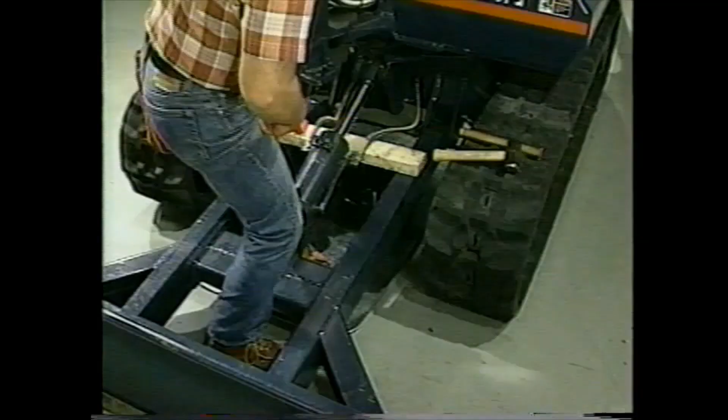To verify the piston seals were leaking on the dozer blade, the technician could have easily tested the piston using the excavator's hydraulic system. Before doing this, pay attention to all safety factors. To leak test the blade cylinder, first remove the cylinder rod pin

and lower the rod cylinder. Start the engine and retract the cylinder. Shut down the engine and lower the rod cylinder the rest of the way.

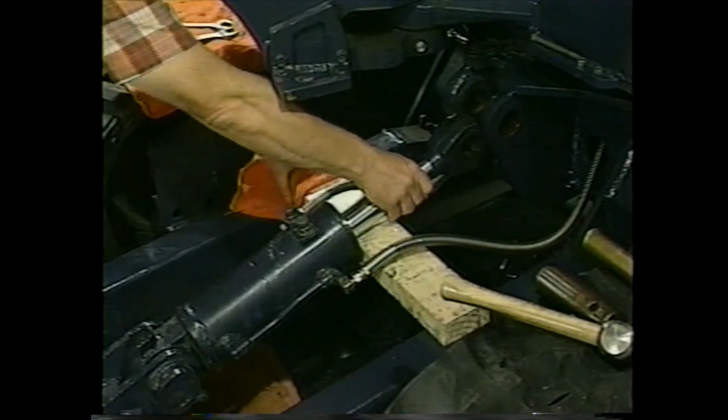Start up the engine and fully extend the cylinder. Then shut the engine off. Remove the hose for retracting the cylinder and plug it. On the KX series, it is necessary to plug it for a valid test.

Start up the engine, stroke the blade valve to fully extend the cylinder, and apply system pressure to the cylinder for 15 seconds. Observe any oil dripping or flowing out of the cylinder.

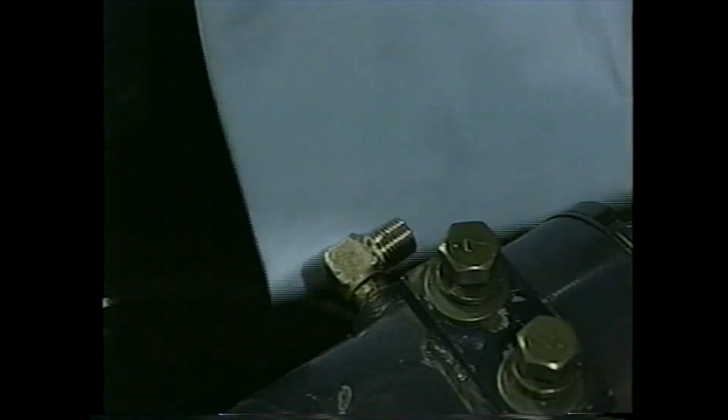Minor dripping may not be cost-effective to repair. When oil flows past the piston seals, the cylinder cycle time will be slowed down, requiring repair and replacement of the cylinder.

Quite often, technicians think the cylinder will creep down if the piston seals leak. However, this is an incorrect assumption.

For example, when a piston is extended halfway, there is less oil volume on the rod side of the piston than on the open side. It would be impossible to put the larger volume of oil into the smaller space. Therefore, the piston cannot move. In fact, because of this difference in volume, the piston cannot go down even if the piston seals are removed.

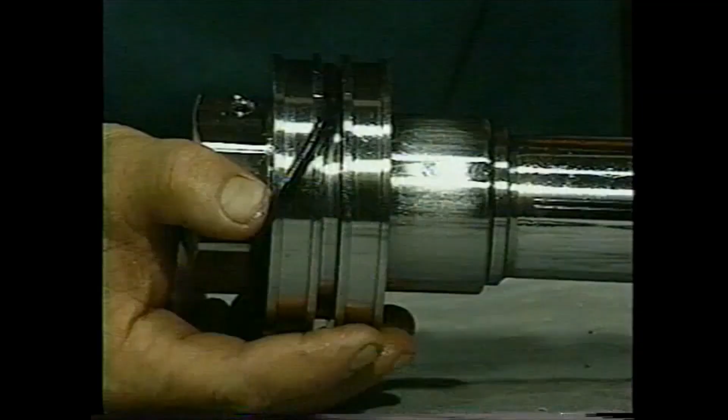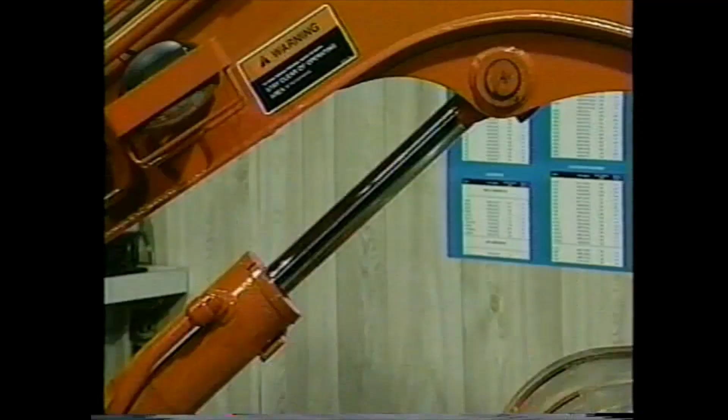To prove what we just stated is true, we removed the piston seals out of the boom cylinder, reinstalled the piston and rod, raised up the boom, shut down the engine, and plugged the ports. 1 hour later, the boom was still up where we left it.

Another excellent technique in determining the cause of cylinder or valve leakage is the use of the hydraulic analyzer. As a general rule of thumb, if a circuit has leakage in only one direction, it is usually the directional control valve. If it leaks in both directions, it is generally the piston seals.

So, that takes care of our last case study. Don't forget to check with your instructor and complete the key points checklist for case study 4 in the Hydraulics Diagnostic Reference Manual.

During our time together, I've talked about 4 case studies. The diagnostic mistakes shown in this program happen quite often, especially when a systematic approach to troubleshooting is not followed. To avoid costly mistakes, refer to the hydraulic schematic, use the correct diagnostic tools, and follow a logical, pre-planned diagnostic system. With a little experience, as well as following standard practices and procedures, you can solve just about any service problem.

We know at Kubota that when a tractor is well maintained, it will perform quickly and efficiently. Parts will last longer and provide better service. Scheduled maintenance should be performed on time, every time.